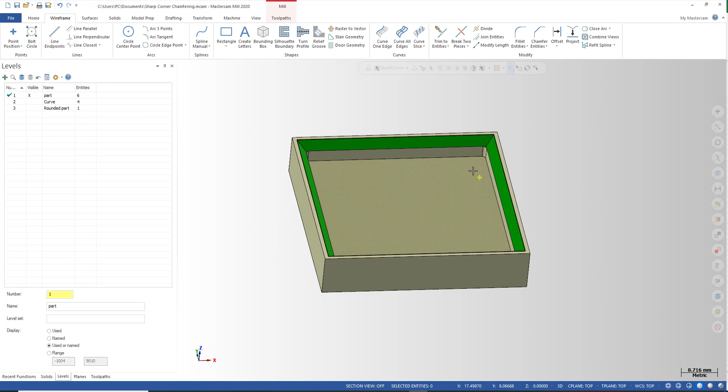Today I'm gonna show you a Mastercam tip on how we can make a sharp corner chamfer on the part. You can see here I have a very simple part for demonstration, just a rectangular part with a pocket at the center, and it has a big chamfer on the top, like what you can see here.

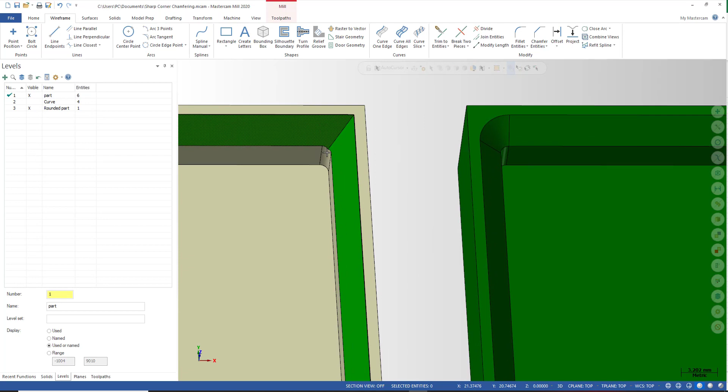The thing is, instead of a round corner, it has a sharp corner here on the chamfer. So the question is, is it possible to do that? I'm pretty sure some of you may think it's impossible when we do cutting with a chamfering tool, and the part should look like this with a round corner and some material left at the corner. Yes, I used to think about that too, but finally I figured out that this sharp corner is possible to make. It's not impossible.

So on this video I'm going to show you how we can make this sharp corner chamfer. Let me turn off this level and we keep going on with this one.

You can see here I already made some toolpath for roughing the part, and I also have a chamfering toolpath. So this is a pocket, some rest machining for the corner, and I also have a chamfer toolpath, so you can see.

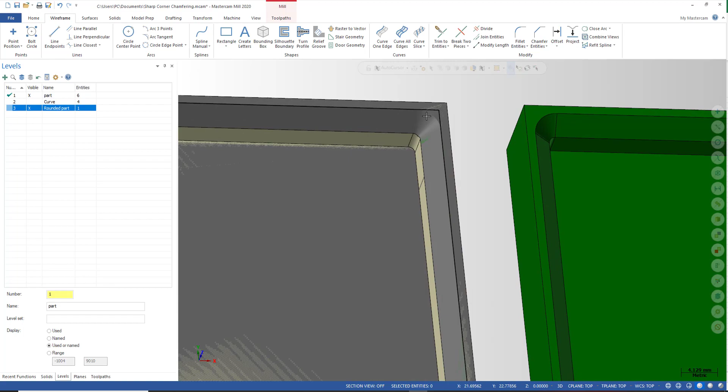When we go with the chamfer, here's how the part looks, and it's exactly the same as what I showed you earlier. Yeah, we have a round corner. We don't have a sharp corner. We have a round corner like this with some rest material at the corner here.

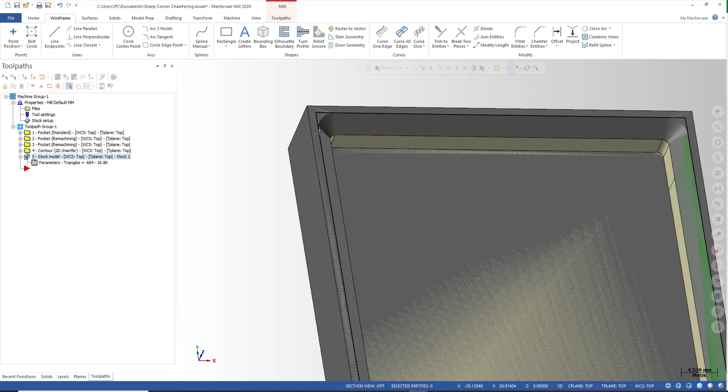So you can see when we do a chamfering with a chamfering tool and a 2D chamfer, we cannot clean all the material at the corner. So we need to find another way to clean this corner, and we need some additional move to clean the edges. Now I'm going to show you how to do that.

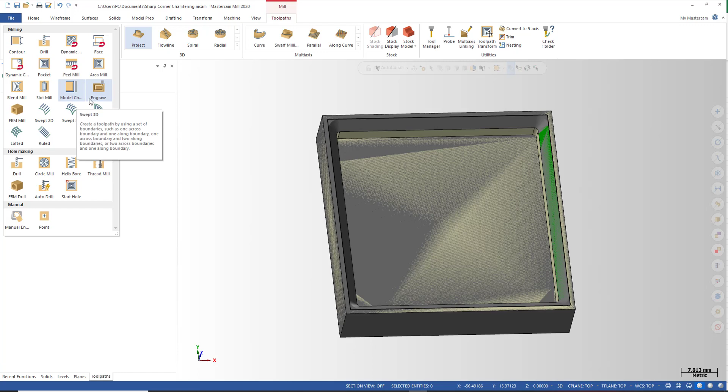So I have two methods to do the cleaning up. The first one, maybe the easiest one, is to use the Mastercam engraving toolpath. It can be found here on the 2D toolpath group. You can see it, we have engraved toolpath here. I'm going to select this toolpath to make the sharp corner.

The first thing we need to do is select the chain for the toolpath, and I'm going to select this chain on the top, this rectangle. So we use this chain for doing the chamfer using the engraving toolpath.

Then I'm going to select the chamfering tool, and we can take a look at the tool here. I have a 12mm chamfering tool with the tip diameter of 0.2, and you need to take this into account - this is the tip diameter. You need to remember about this. So this is the chamfering tool I use.

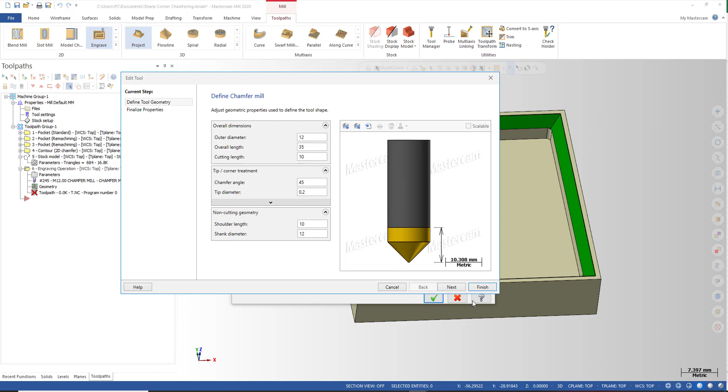Next we go to the parameters. Some parameters we need to take care of are the feed plane and the top of stock. So this chain is on the top, so you're going to select this. It should be 0, and then the depth of cut.

On this part I have a 2mm chamfer wide, yeah, it's 2mm wide. So I want to make the tool go a little bit deeper on the chamfer, so I'm gonna use maybe -2.5. On the XY stock to leave, I can leave 0 because I don't want to leave any stock on the part. And also we can turn off this filter, no use now.

Next, the roughing we can skip. One important thing is on the cut geometry here, you should select 'on top' because the chain we selected is on the top of the chamfering profile, so it should be on top, not at depth. So I'm gonna select on top, and it's just very simple, right?

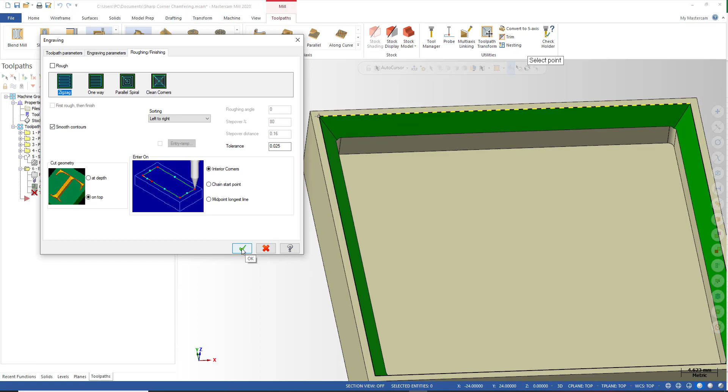Now we click OK and see how it works. You can see, very simple, and we got a cleaning up toolpath. This is the stock model. After the chamfering toolpath, we have some rest corner, some corner here with rest material.

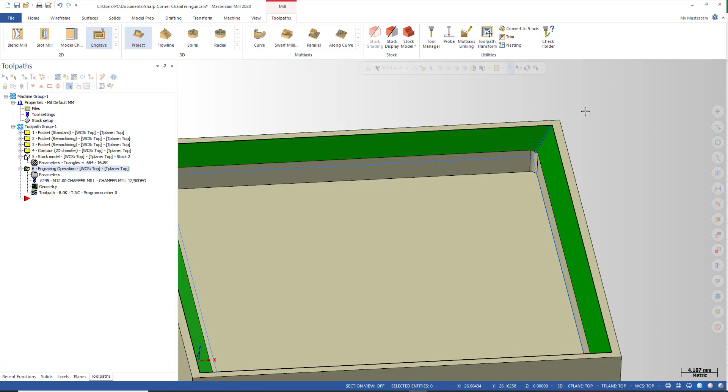Next to the engraving operation, let's see how it works. We do a back plot. You can see, instead of just moving around, the tool makes some 3D cut here and cleans the corners.

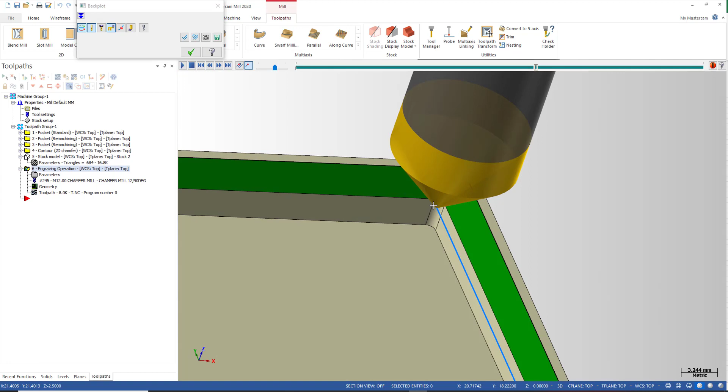It moves up at the corner. Let's go to the next position, moving up and going back, then go to the next corner. It keeps doing the same movement at all 4 corners. So, very easy, right?

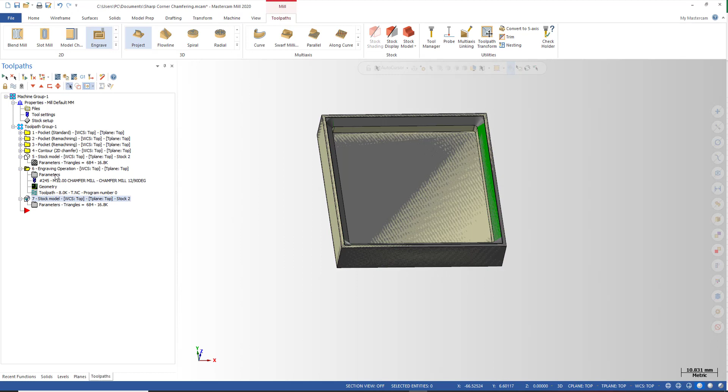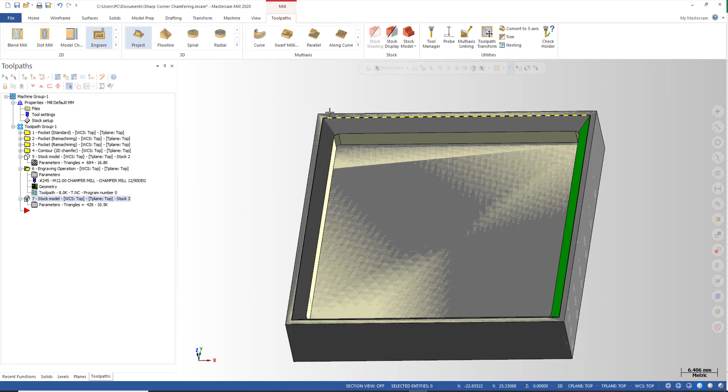And then we got a cleaning up toolpath. I'm going to copy this stock model and see how the part looks after this engraving operation. I named it stock number 3, and the stock model it's looking at is stock number 2, and this operation is now number 6. So we can generate it and see what we got. You can see this is the first stock model, and this is the stock model after we do the engraving operation.

Finally we clean the corner of the part. Very easy, right? So we got a sharp edge. Okay, you can see, very easy.

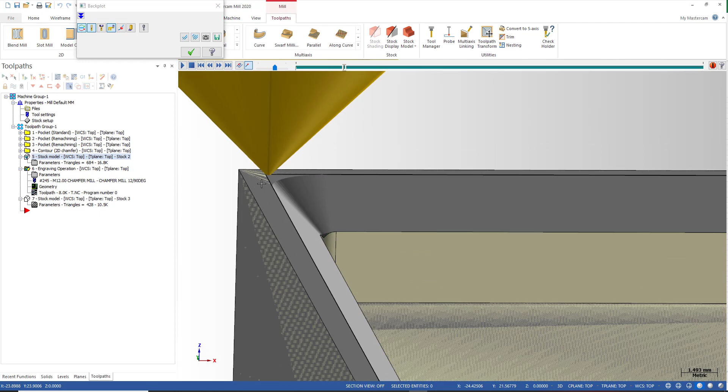There's something I need to talk about with this operation. It's very easy, but you can see here, turn on stop. At the first position, you can see the tool drop right at the top of the corner and move down. With a tip tool like chamfering, this movement is not so good because it's digging into the raw material here. The tool will dig into it, so it's not so good.

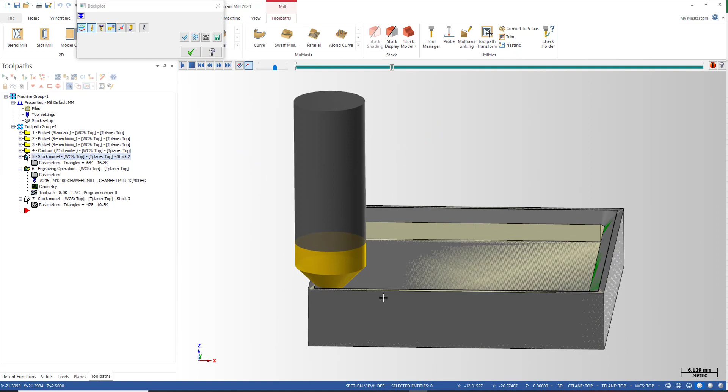If you want to avoid it and want the tool to go from the bottom to the top like this, you need to do some adjustment.

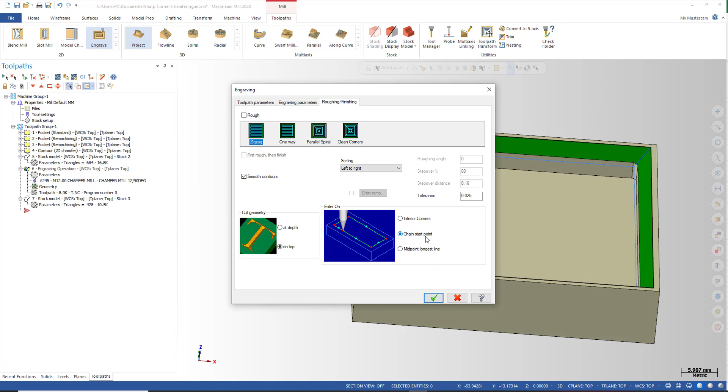You go back to the parameters here, and we move to engraving, roughing, finishing, and here we can see something called Enter On. This allows us to select the first position of the tool when it's engaging the part. So instead of selecting corner, we can select this option, Chain Start Point, so we can make the tool enter the contour at the start point of the chain, and we generate it again.

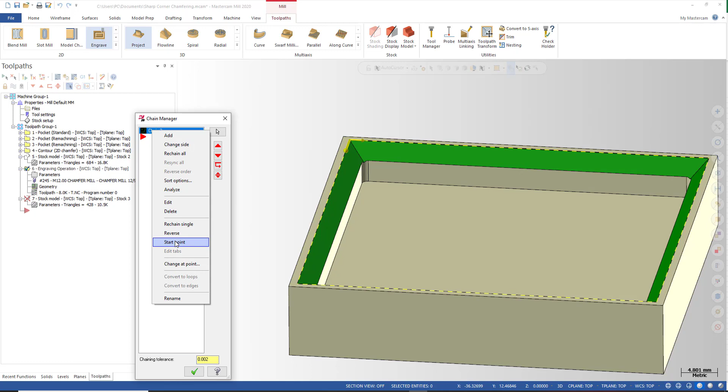Okay, and it keeps the same, right? Because we haven't selected the chain, the start point of this chain is here. So if you don't want to engage at the corner, you should move it along this chain so it can avoid the corner. We just right click and select Start Point, and you can freely move the start point of the toolpath right there.

So maybe I want to engage at the center, at the midpoint of this side, and click OK. So we move the start point from here to here, and then we can generate a toolpath again.

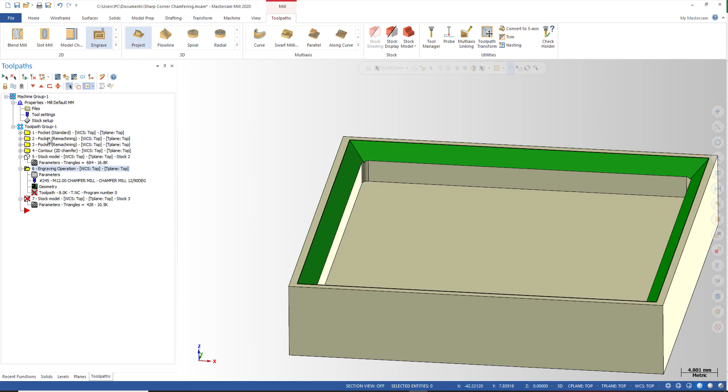Okay, you see a difference. Now the tool engages from the middle of the part, not at the corner, so we can avoid the blunt movement at the corner. It contacts with the part here, goes to the first corner, moves up before moving down, goes to the next corner, moving up, moving down, and goes to the next, cleans the corner, goes to the last position, cleans the corner, and goes back to the midpoint of this edge.

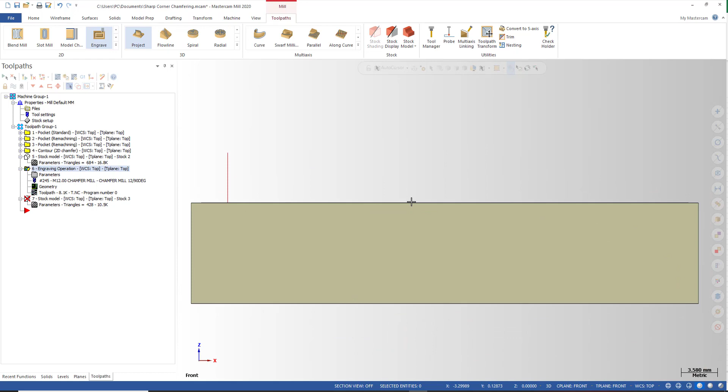So that's what we can do with the engraving toolpaths. Still very easy, right?

And if you want some roughing pass before you do the finish cut, you can use this 2D chamfer for making the rough passes, or you can also go here and select Depth Cut. With the depth cut option, we can give it more roughing before doing the finish cut.

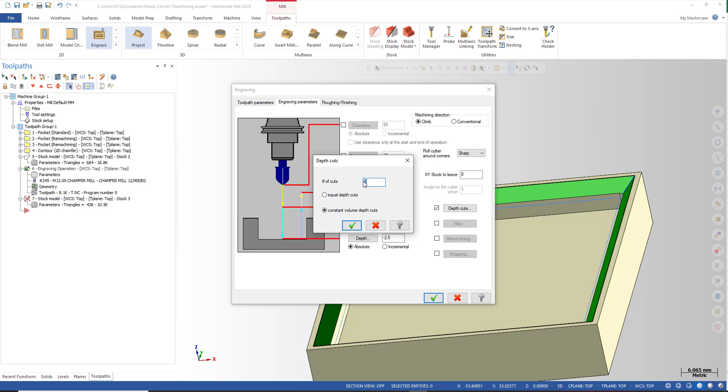You have two options: Equal Depth Cut and Constant Volume. Maybe this option will be better, so we remove a constant amount of material on each pass. Maybe we go for 3 passes. So you got a toolpath like this, with 3 cutting passes.

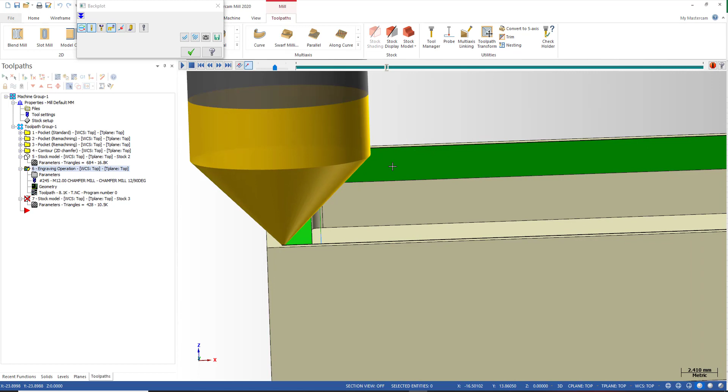Talking about this operation, there's also one thing you can improve. I go back and remove the depth cut here, so you can see for this toolpath, when the tool is cleaning up the corner, it stops right on top of the part. If you think that's not enough and you want the tool to extend a little bit so the tip goes higher than the top of the part, you need to do some trick.

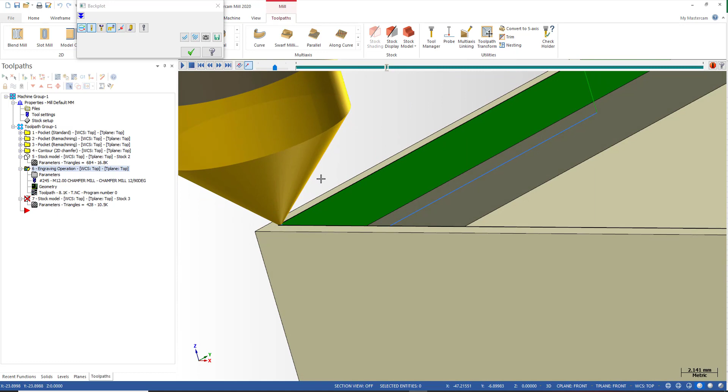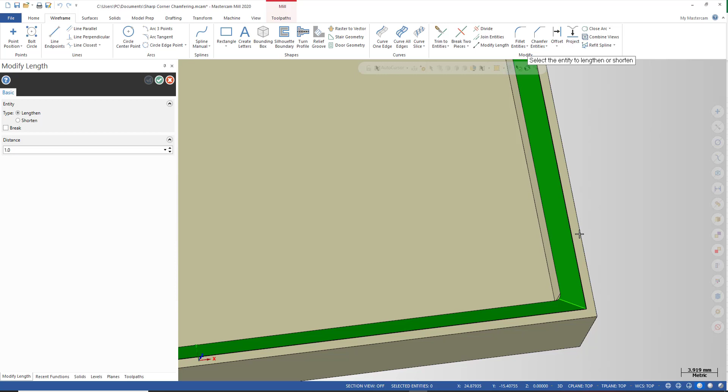You want this tip to move up a little bit, so this is how we can do it. I should extend this edge a little bit, like this. First I make some curves here on the edge, maybe 2 is enough, and then I extend them a little bit, just extend by the amount you want, maybe 1 millimeter, like this, extending to the top of the curve. So now we have this chain and this chain.

Okay, and then I'm gonna create a rectangle with this point and this point. You can see when I draw this rectangle, it's the same as when we extend the surface. So you can just draw a rectangle like this, a new rectangle, instead of extending this surface.

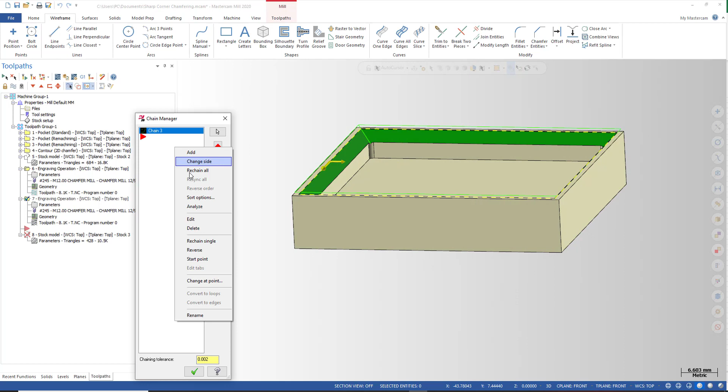And we can make another toolpath and keep the same parameter. We just select a different chain. Now on this toolpath, I'm not selecting this chain on the top, but I'm gonna select this upper chain we just created like this. You can see this is a new chain, and it's higher than the top of the part.

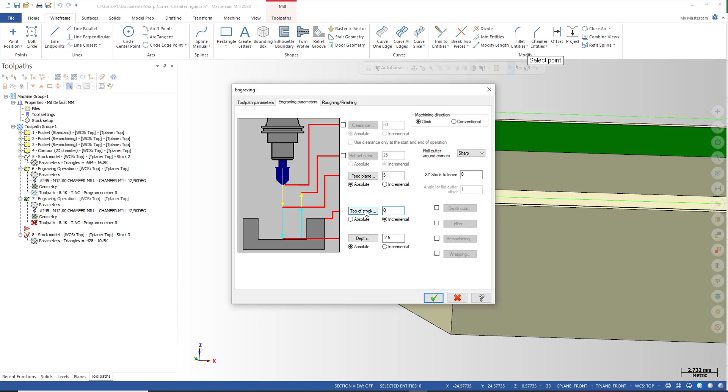Same tool, and we just need to change the top of stock like this. Instead of 0, we select the height of the chain we selected. It should be 0.578, or you can just use this incremental and 0. So we consider the height of the chain as the top of stock. And we gonna generate it again.

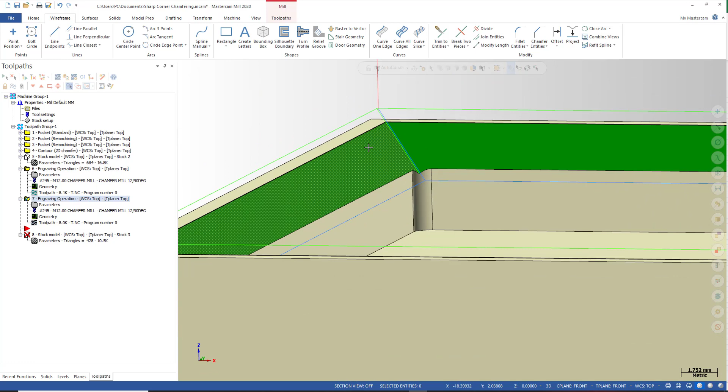Okay, it's done, right? You can see the difference between the toolpaths. This one, the tool just stopped here right on top of the part, but for this one it extends a little bit, so it does a cleaner cut.

Alright, so you can see this is the important movement, the clean corner movement. Very simple, right? This movement makes the sharp corner for the chamfer.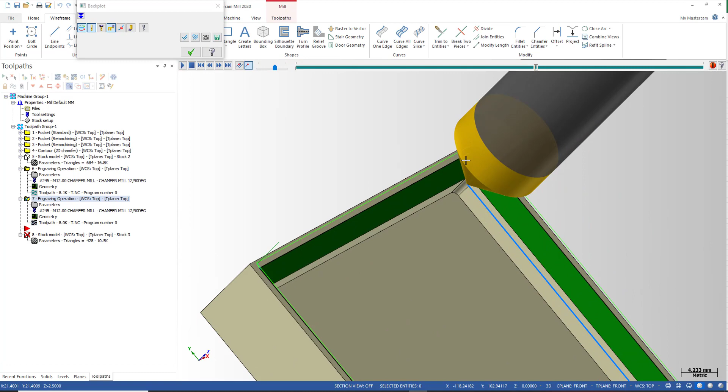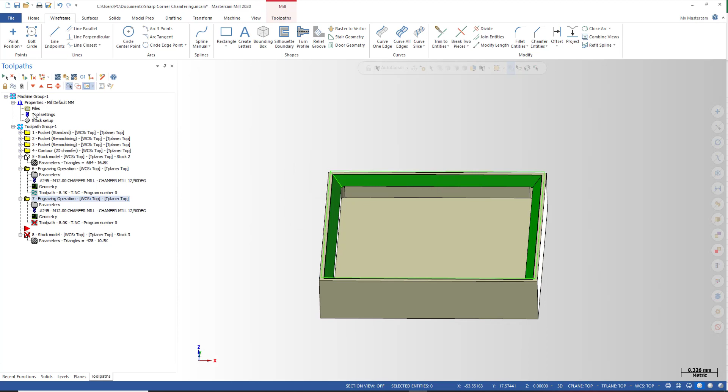Okay, very simple. So is there anything we need to talk about this toolpath? Is there something you're not satisfied with this? I forgot to select the start point for this toolpath. It should be around here, and avoid engaging at the corner of the part. Okay, generate again.

Nice. I can remove this and this so you can see it clear, right?

I think if there's one thing we are not satisfied with this one, it's also that it doesn't provide us the option to select the lead in and lead out movement. So the tool plunges straight into the part, no lead in and lead out.

So if you want to go further, I can show you another way to give it a lead in and lead out. Okay, it's just additional information. You can skip this if you feel this is enough for the toolpath, but I'm just gonna show you if you want to know about it.

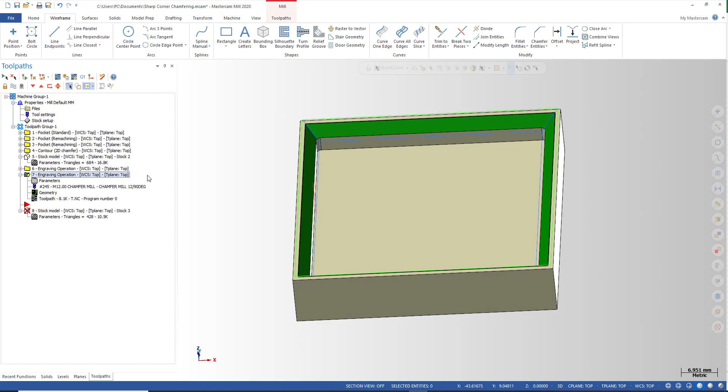Okay, so this is the engraving operation without any lead in and lead out movement. I can try to see if we can find some lead in and lead out here. Yeah, maybe not.

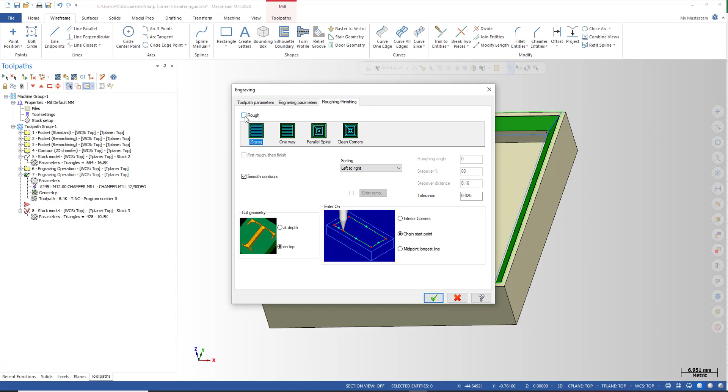So we can only select the entry ramp when we activate the rough contour, the rough option. So since we don't use the rough option, it cannot be used.

So my solution is we're gonna use another toolpath, and that's the project toolpath. I had another video talking about this one, a very nice toolpath. We can use this to convert another toolpath.

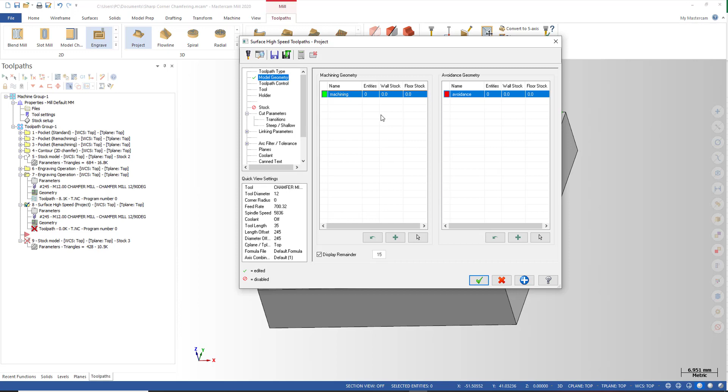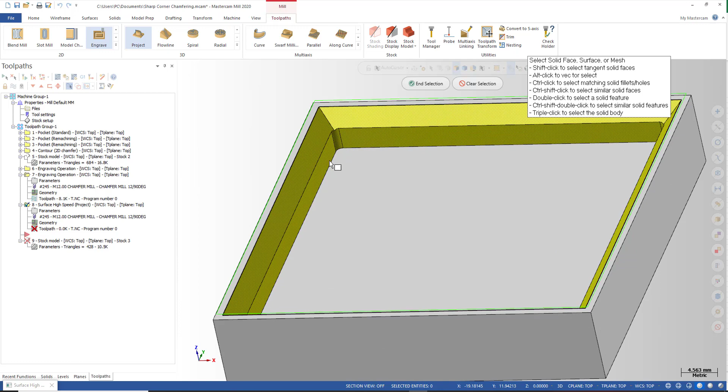And I can select this chamfer for the drive surface. About selecting the surface, I suggest that you also select the vertical faces here. If you only select the chamfer face, I tried to just select only the chamfer faces, and I got an interrupted cut. So when I also select the vertical face here, I got a continuous cut without any interruption. So you can do like this, select also the vertical face here.

Alright, and we select the same tool for doing the project toolpath. In the cut parameters, we select the engraving operation, and you can add some depth cut here. It is also very nice. We can add some rough and finish cut, and for the projection type we select NCI, so it will take the toolpath from this operation and project it onto the surface we selected.

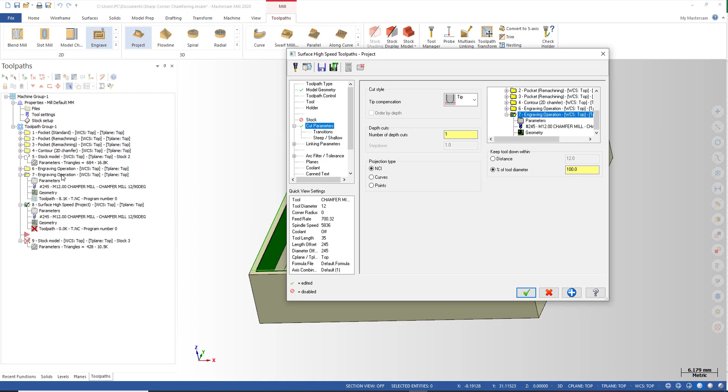And if you want some lead in and lead out, just go to the linking parameter here, and we can give it a lead in and lead out. For that, maybe I'll use some vertical arc entry and arc exit. Okay, so with this way we can add a lead in and lead out movement for the toolpath.

Okay, with the project toolpath, because this toolpath doesn't support horizontal entry, we can only get the vertical entry and vertical exit. But it's better than just using a blunt straight movement, right? It's better to do that with some lead in and lead out movement.

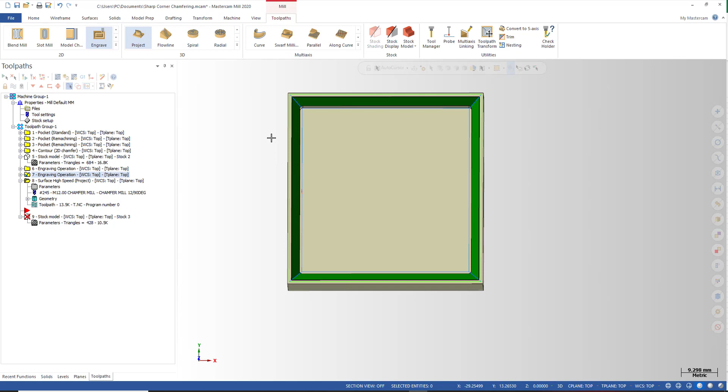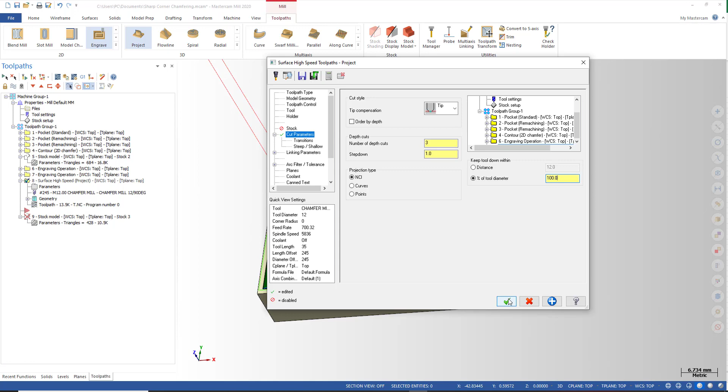Okay, so I just showed you how we can create the sharp corner chamfer using the engraving toolpath. Very nice and very easy to use toolpath, and by combining it with the project toolpath, we can add some lead in and lead out movement for this engraving toolpath, and we can also do some depth cut for the toolpath. We can split it, doing some rough and finish cut like this.

Yeah, you can see, very nice, right? With the lead in and lead out movement, and also the depth cut.

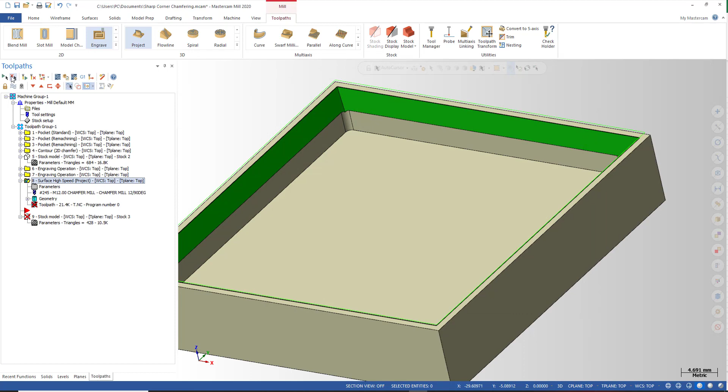Okay, so we are done with the easiest way, the engraving toolpath, and I have another way to do the sharp corner here. I think you can guess what I'm gonna use.

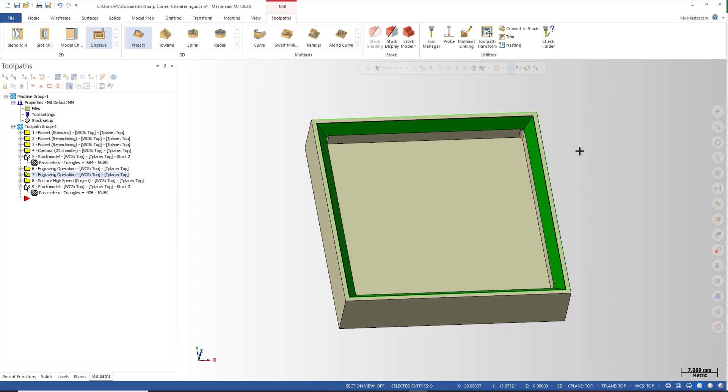The second way we can apply is it can be considered as an old school tip, we just need to use the 3D contour. You know how we can make this sharp corner, and you can select the right toolpath for this. So if you don't want to use engraving operation, you can just use a 3D contour toolpath like this.

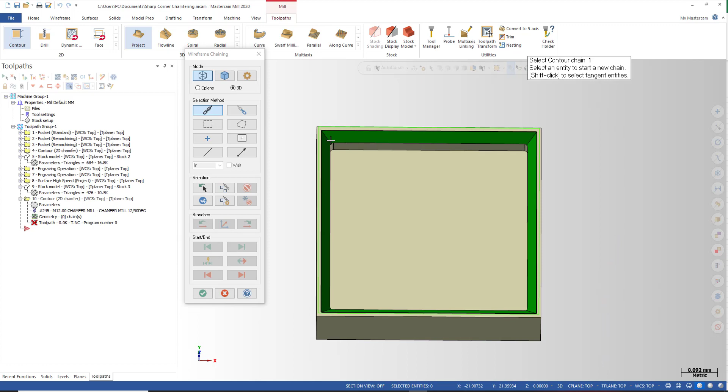Before you select the chain, I will recommend that you create a wireframe curve so you can easily change or extend the curve, because with a 3D toolpath you cannot extend the lead in and lead out. So I recommend you create a curve first at the corner.

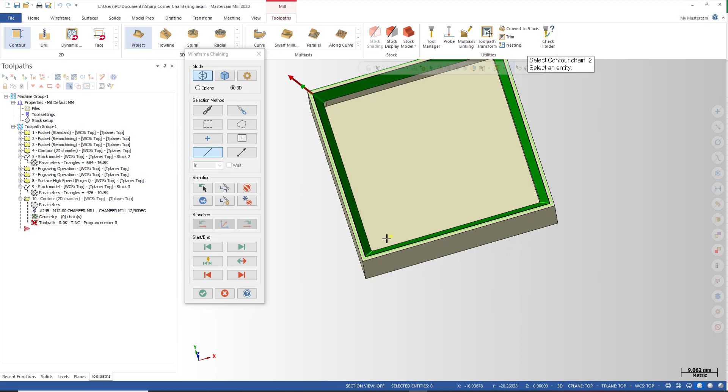After that you select the contour toolpath and select the curve here, which we just created. And I want it to do the cut from the bottom to the top like this.

Select the tool here, the 12mm chamfer, and in the compensation type, of course, you want the tool tip to follow this curve, so this compensation should be off, and the contour type now becomes 3D.

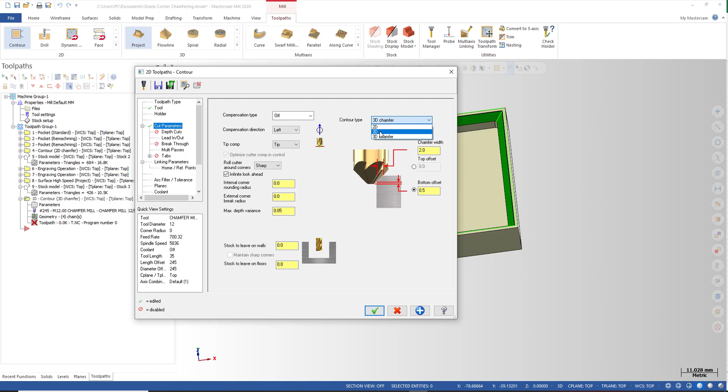The tip of the tool will follow this curve to clean the corner. So stock to leave on floor and on wall is 0. I can eliminate the lead in and lead out movement.

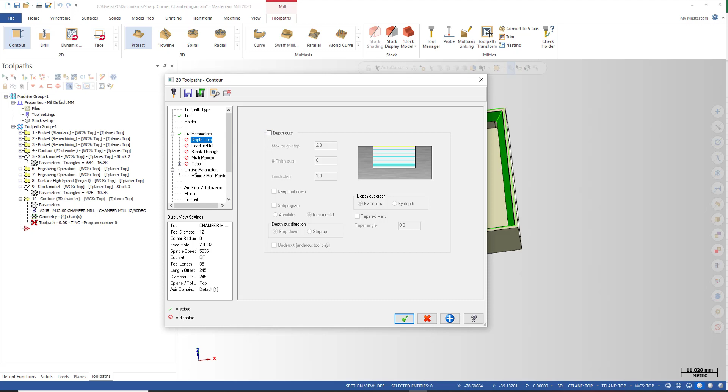Also the multi-passes. You can activate the depth of cut if you want to get some rough and finished cut very nice with this 3D contour. And for the depth it should be 0, because you want the tool tip to contact with the part at this corner, so it should be incremental 0, because in the 3D contour you only have an option for incremental depth.

And for the top of stock, you can input some material here if you want to do the roughing cut. If you just want to make one cut, so this is not important.

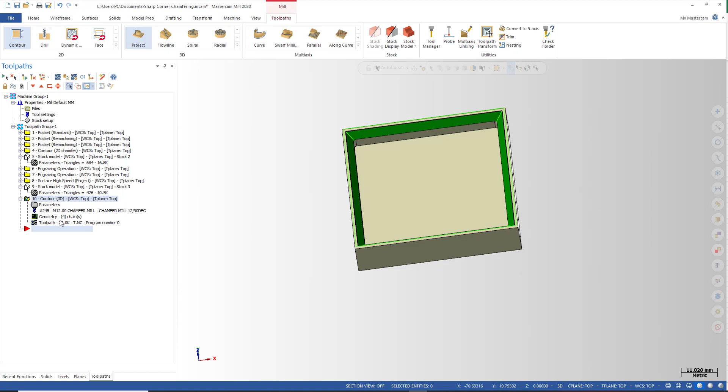And bing, let's see what we got. Alright, you can see the tool cutting plunge into the start of the curve and move up.

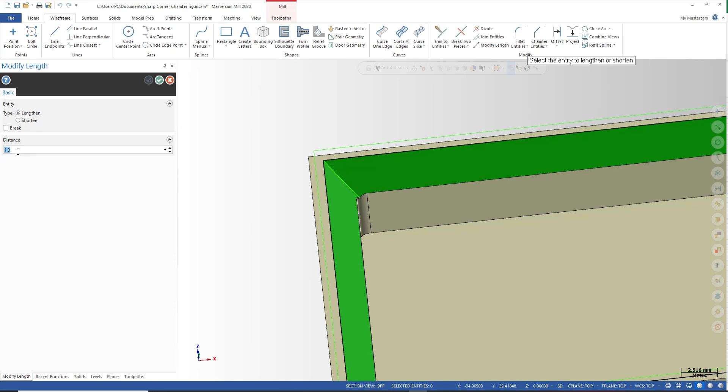So we don't want the tool start from here. You just need to extend it a little bit so we have some clearance before the tool engaging the material. Okay, I'm gonna extend it 1mm far away from the part, also on top and bottom like this.

So you can see when we create a curve, we can easily extend or shorten it, so it's very easy. Right now it's a little away from the part. Maybe it's not enough, you can extend it more.

If you want some rough cut, you can activate this one. Maybe I want one finished cut 0.2, one rough cut, and one finished cut. Yeah, if you want to use this one, you need to define the correct top of stock here.

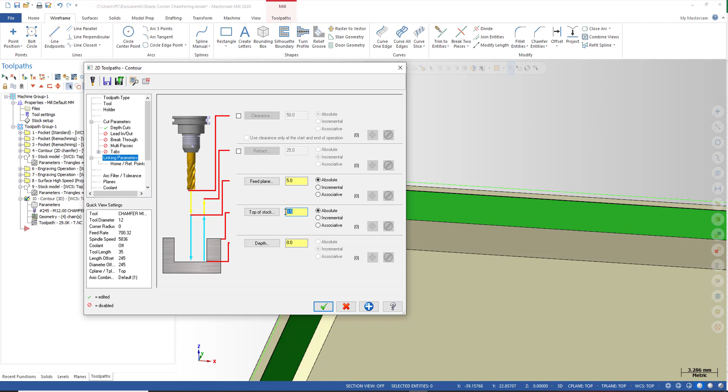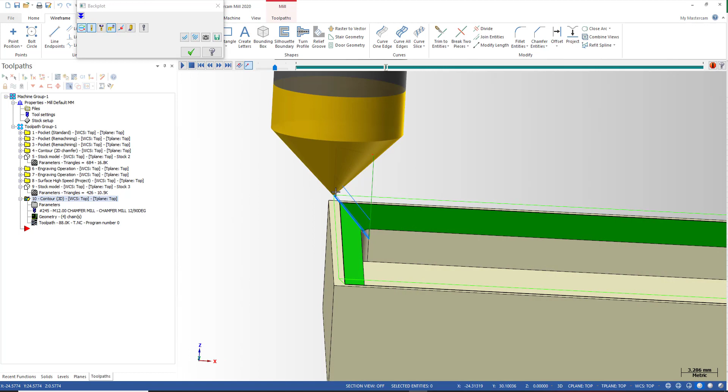I just need one rough and one finish. Oh, it's gonna be too much for the finish, right? No. 0.1, 0.2. What happened? Oh, sorry. It should be incremental 0.5.

Okay, now we got one rough cut here and one finished cut like this, rough and finished.

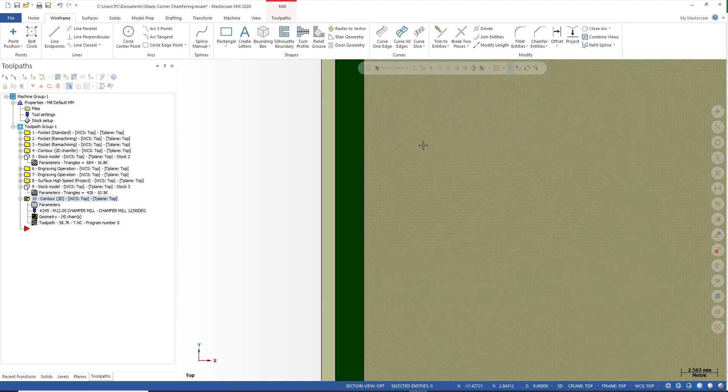But when we use the contour toolpath, there is a very important thing that you need to take into account, that the tool tip diameter, you know. You can see here we have a tip diameter of 0.2, and for this toolpath...

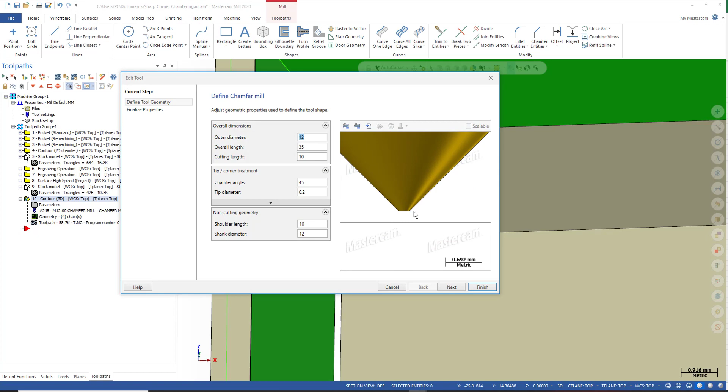You can see the tool, this is the tool tip right on the center of the tip. So if you just use a depth 0 here, the tool will go into the part like this.

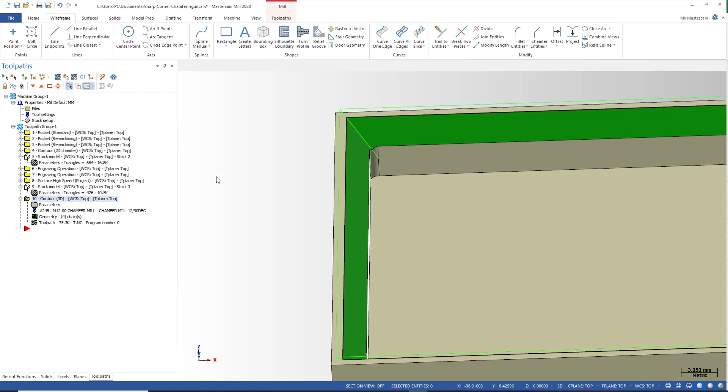I can split this movement so you can see it easily using the segment length, so you can see how it contacts with the part. Yeah, go back. This is the rough cut and this is the finished cut.

You can see the tool center, the tip center, if it follows this curve, the tool will go off into the part and we don't want it. You can see here it's not in contact with the part, it cuts into the material right here and right here because it's moving a little deep. So we need to compensate for the tool tip diameter.

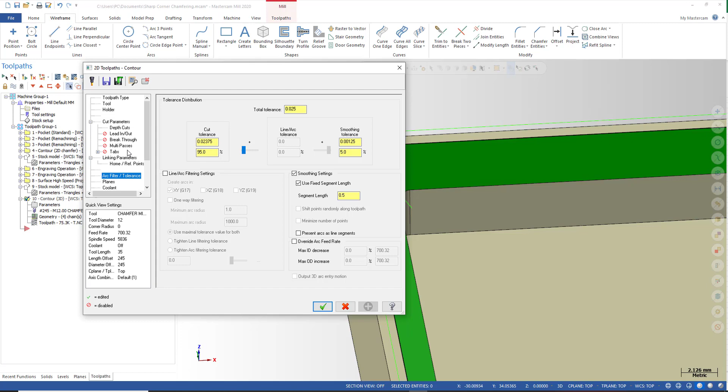How much we need to move it up depends on the angle of the chamfer, the angle of the tool, and the tool tip diameter. In this case it's very easy. We have a 45-degree chamfer and the tip diameter is 0.2. We just need to lift it up an amount equal to half of the tip diameter. This means 0.1.

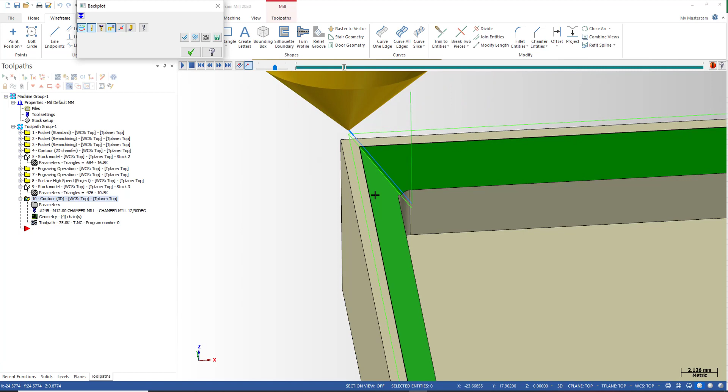To get the correct cut, you can see here in the depth we should move it up an amount equal to half of the tip diameter. It means 0.1 in this case, and now we've got a correct cut, not gouging. You can see the tool contacts the part now, no gouging.

I will leave two tool paths so you can do some comparison.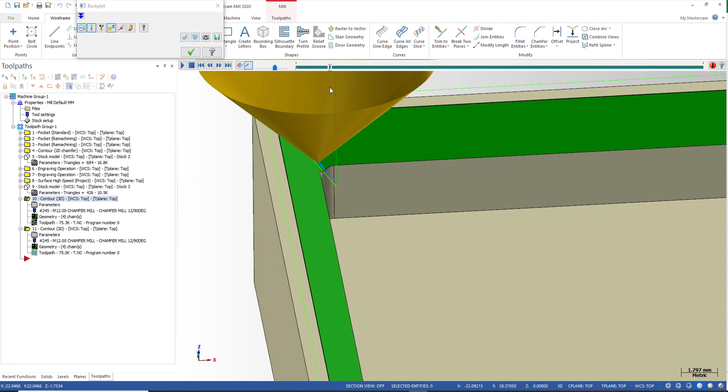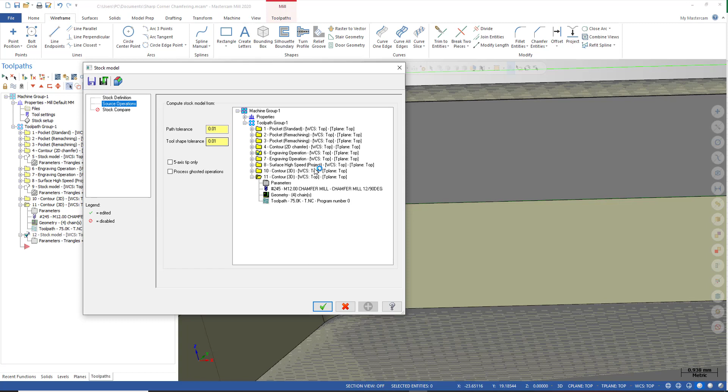This is the first tool path without our depth adjustment. We have some gouging here. If you want to see this, I'm going to make another stock operation, a stock model, so you can see it clearly. We name it stock 4, and this is stock 3 and number 10 operation.

You see that we have some gouge here. I'm going to turn off the part, and this is how it looks like if you do not make the adjustment, right? The tool will go a little bit deeper depending on how much the tool tip diameter is.

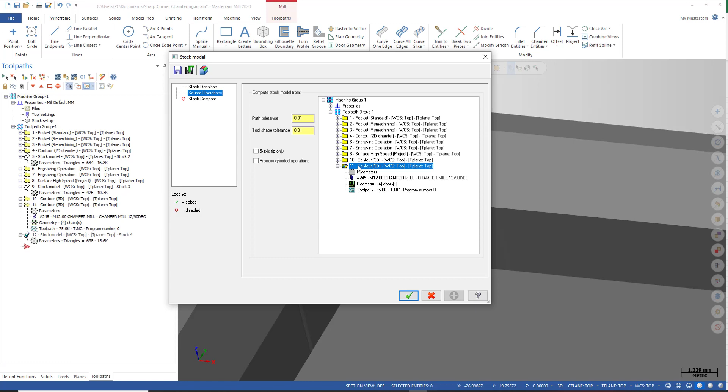So we change to tool path number 11 with the adjustment of the depth, and you can see here it's correct now, no gouging, right?

So if you want to use the 3D contour for this cleaning up operation, you need to take into account the tool tip diameter. No problem if you define the tip diameter as 0, so no adjustment needed. But if the tool has a tip diameter, you need to do the adjustment. You can do the adjustment in the depth, or you can do the adjustment on the stock to leave on floor. It depends on you.

Okay, so that's the video today. I'm going to do some simulation and you can see how it works. Before I quit, let me turn the part back again.

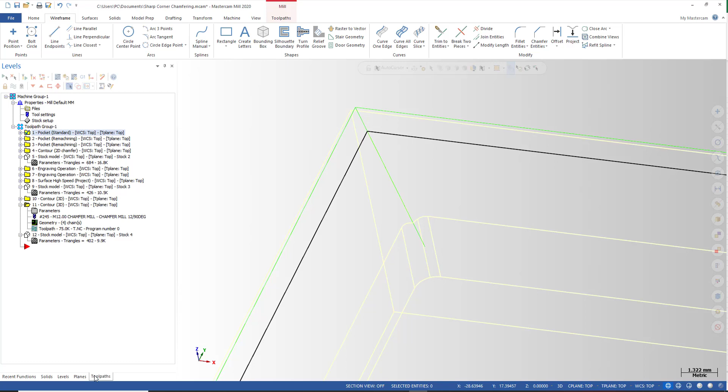Oh, come on. Okay, we're gonna do some simulation. Alright.

So if you want to use the project toolpath, you should ghost this operation, so it's not going to process this one and you just process this one.

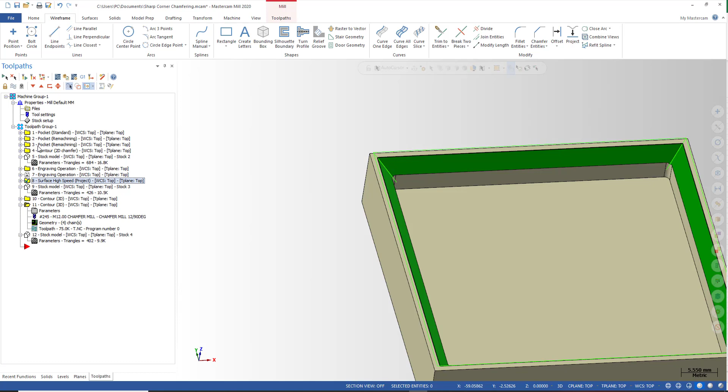This is the pocket toolpath, just forgot it, just for demonstration. And corner rest.

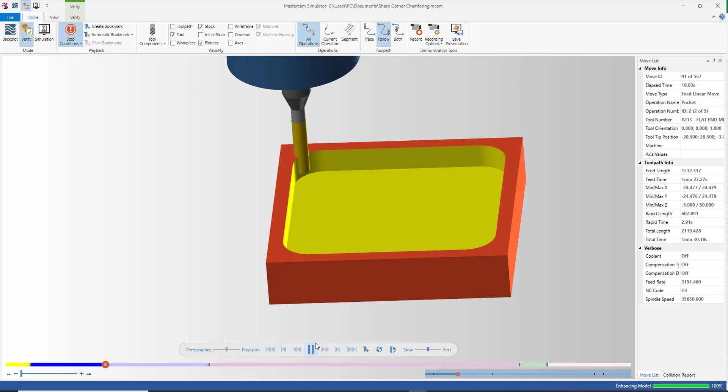Okay, and we move to the chamfer toolpath. And next follow this is the project toolpath. From this project, the engraving toolpath, so we have a lead-in and lead-out here.

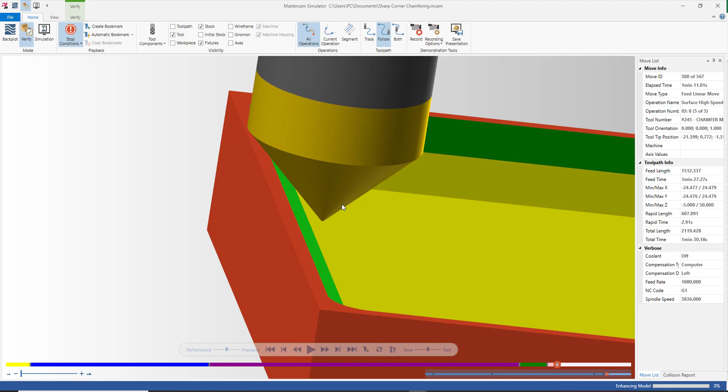It's better than the original engraving toolpath without any entry and exit movement, right? So this is the lead-in, and clean this corner, go down.

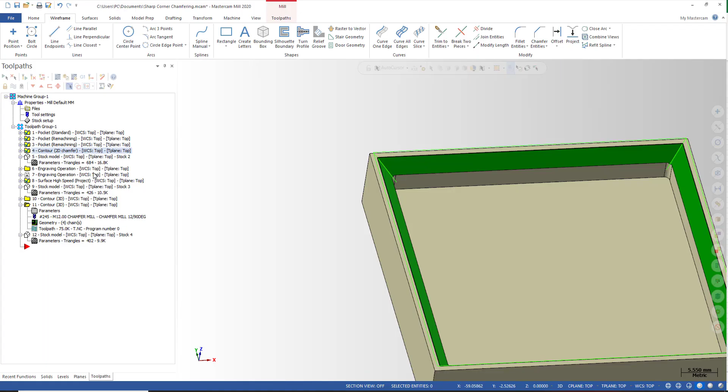You can see we have a gouging here because we didn't select this surface to define it as the part, so we got some gouging here, but we can fix it. Just fix it right now, and we simulate it again.

I can make a surface here. Okay, wait, please be patient. I'm going to patch it with a loft surface. Okay, man, this is the first one.

Going to make a loft surface so we can select it as the part, and we can avoid collision.

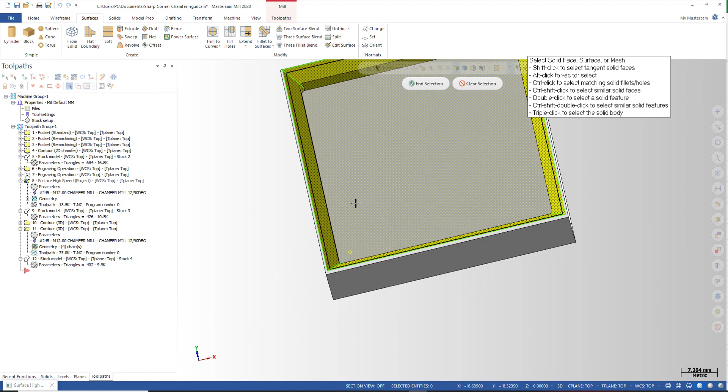Okay, it's better now. Try to see it again. You can also leave some material here at the chamfer operation, so you can see the cleaning up toolpath.

I hope you can catch up with me if I talk too much. Okay, here we go.

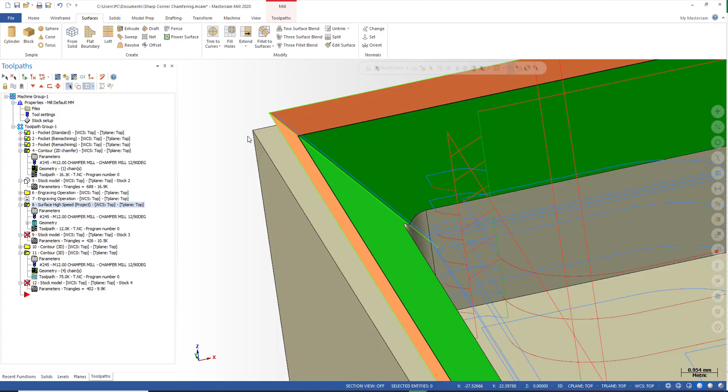We do it again. Pocket toolpath, corner rest machining, and the chamfer toolpath. You can use the chamfer toolpath for roughing also.

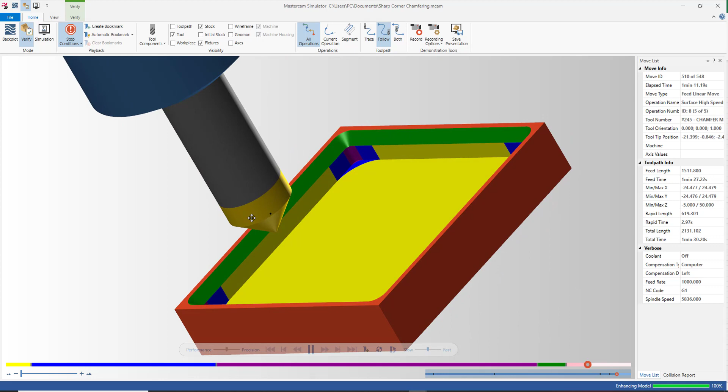And the last one is the cleaning up toolpath. Right here, go to here, clean the corner, go back, clean. See that? Very nice, right?

I think I'm gonna make some real cutting video and put it up later to see how it works, how it looks in this corner.